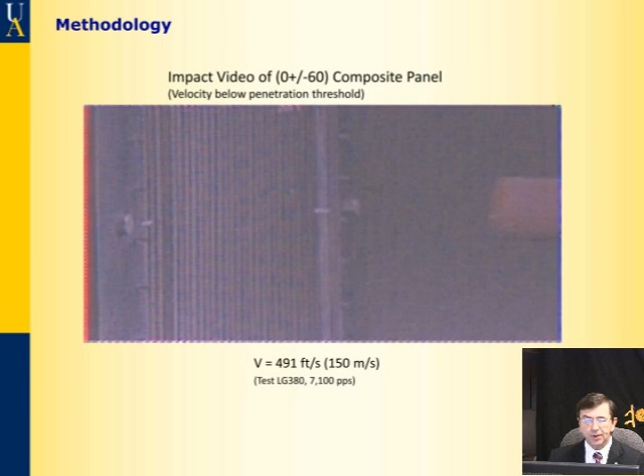To illustrate the high energy impact methodology, let me show you the impact experiment conducted using a gelatin projectile and a braided composite plate. This is the same composite material which has been recently used for the jet engine containment system. To characterize this material, we had to conduct numerous experiments of that type. As part of this research, we also had to create a numerical model capable of simulating such impact experiments. Accurate numerical simulations can be called virtual experiments.

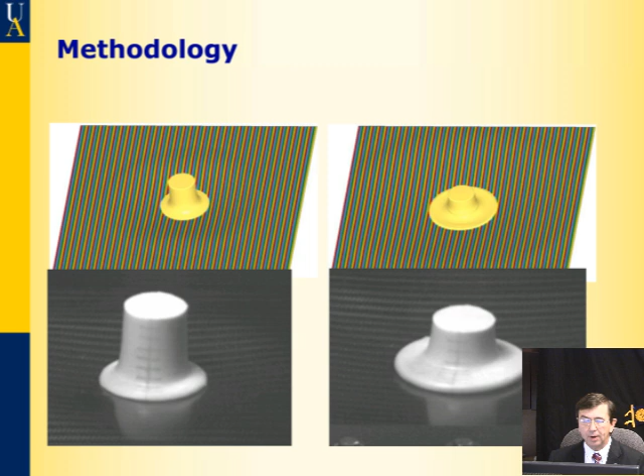First, we had to develop material models for gelatin and braided composites so we could simulate all kinds of impact experiments using LS-DYNA. You can see here deformation in 2 time instances. Each snapshot represents a comparison between the real and virtual impact experiment. It is also important to predict the damage modes. In the case illustrated here, a butterfly damage shape agrees with the experiment for a ±60 triaxial braided composite.

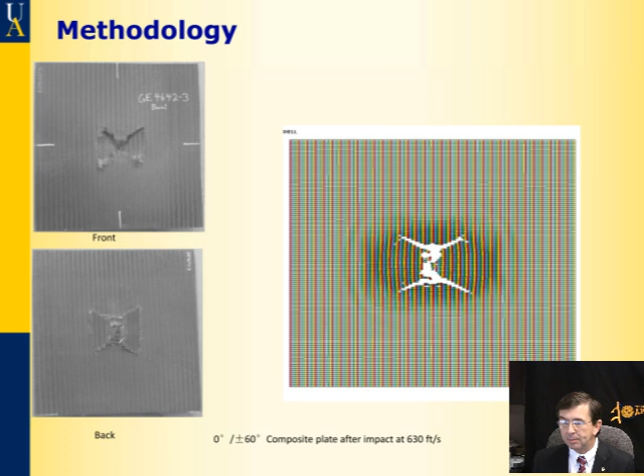Once the model properly represents reality, we gain confidence that we can obtain deformations and failure shapes for any other similar material and for various structures. For example, if we change the fiber architecture from 60 to 45 degrees in the composite, a different damage shape is produced. This shape can be correctly predicted using our model. The model so developed can be used by a jet engine company to design their proprietary engine components.

The FAA requires that commercial jet engine manufacturers conduct at least one blade-out test in order to certify their new jet engine or any substantial modification of an existing jet engine. Such tests are very expensive. Let me show a $20 million test as an example that was conducted at Rolls-Royce.

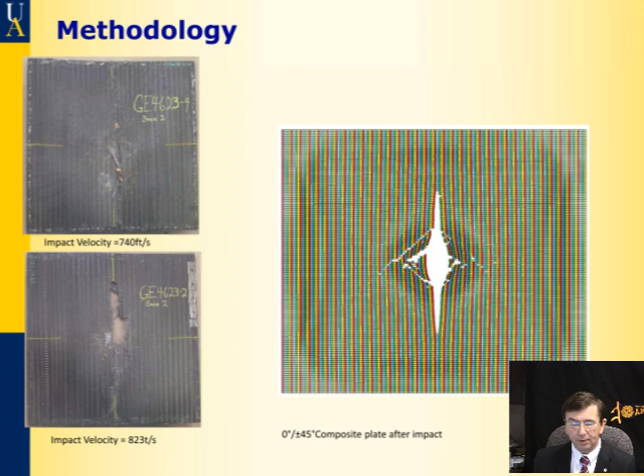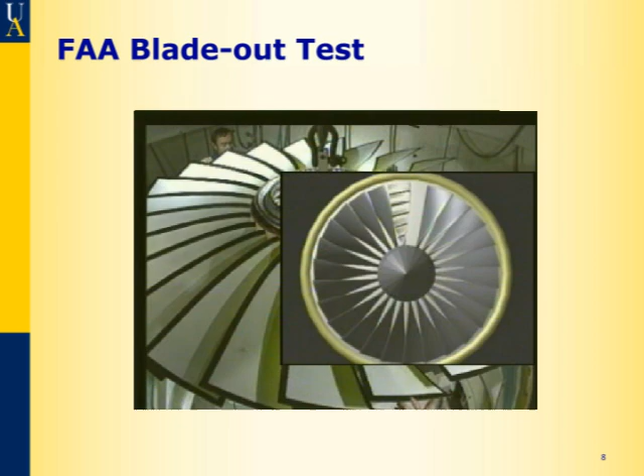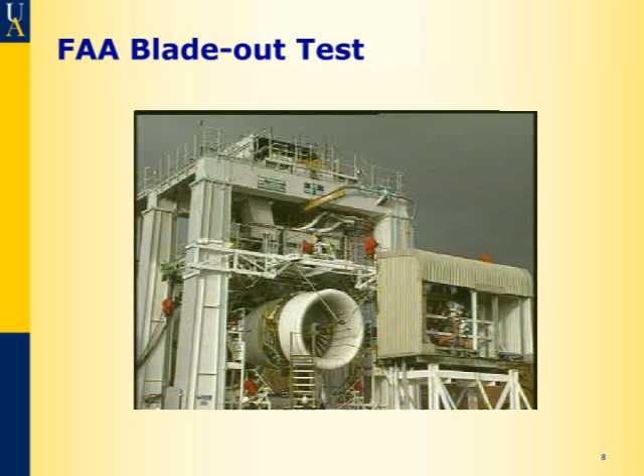In this test, a small explosive charge is used to release a fan blade from the disc. The engine has to contain the fan blade safely and also has to contend successfully with the resulting out-of-balance forces. This is a technology in which Rolls-Royce has a clear lead over any other manufacturer. Nevertheless, the fan blade containment test is regarded as an essential demonstration of safety and integrity.

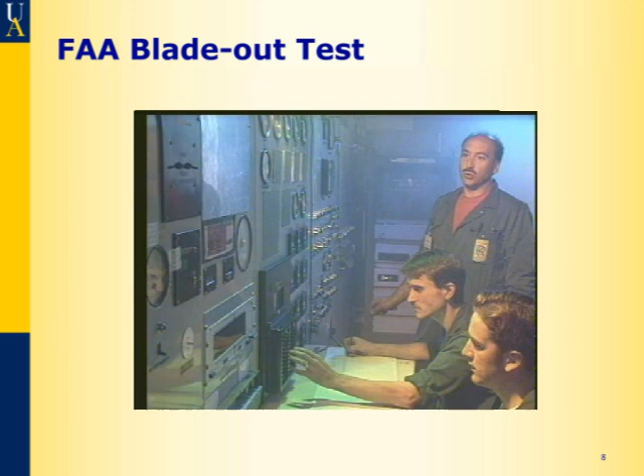A released fan blade contains enough energy to throw a medium-sized car some 100 feet into the air. In a full engine test, this energy is absorbed as vibration through the engine carcass—truly one of the most impressive sights in aero engine testing.

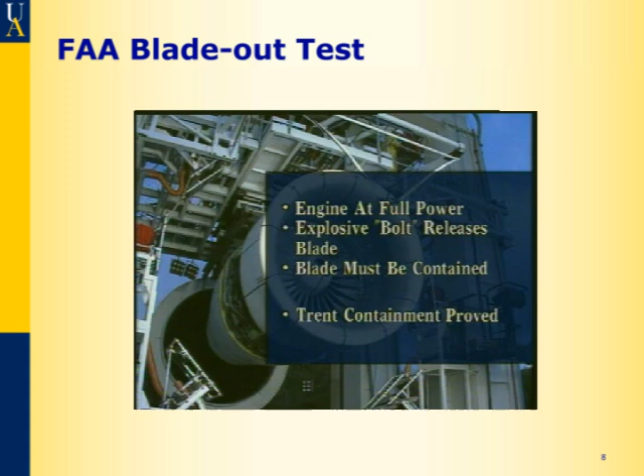Without any apologies, we'll show that again. This is indeed one of those occasions when only seeing is believing.

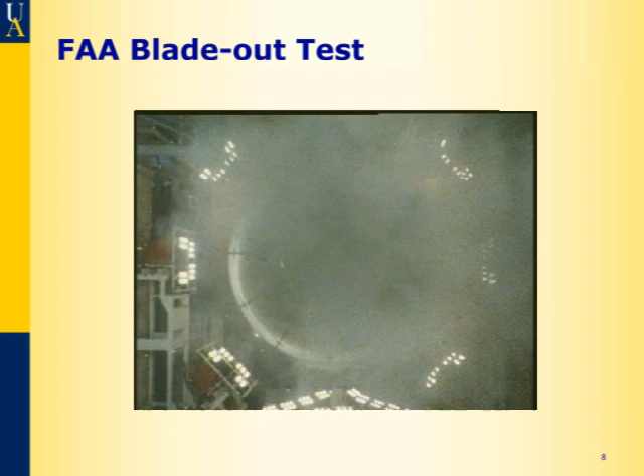Using the virtual test technique with developed material models, manufacturers can try different design concepts for their jet engine, virtually conduct the blade-out test, and become more confident when the real test is conducted. You can see here the simulation of the blade-out test using the model that we have developed.

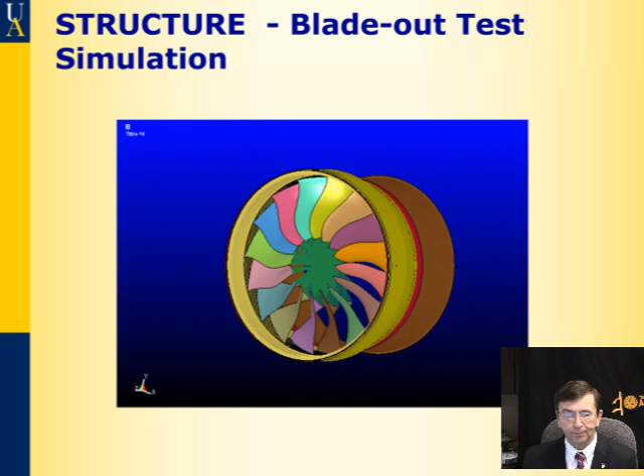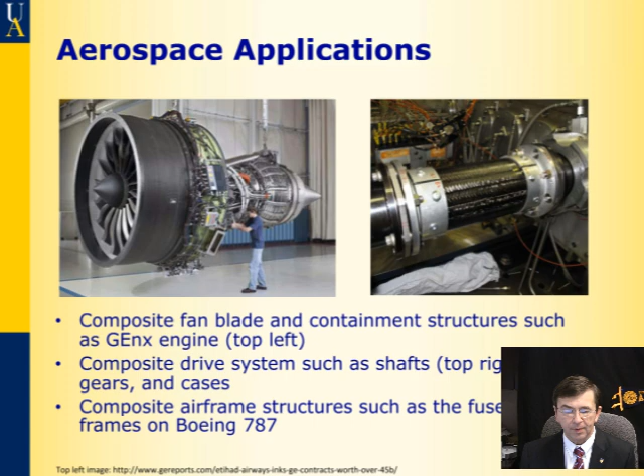As I said, the above shown braided composite material has been used for the containment system in the GEnx jet engine, but is also considered by other aerospace companies for different applications. On the left in this picture you can see the GEnx engine, and on the right you can see the shaft of the helicopter engine.

Before I show you how our methodology is used to analyze this airplane crash, let me give you some background information.

About this particular crash, the Russian investigating committee in their final report wrote in section 3.1.69 that the aircraft collided with the birch, with a trunk diameter between 30 to 40 centimeters, which led to the left outer wing portion of about 6.5 meters long being ripped off in an intensive left bank. Originally they put 4.7 meters, but then they crossed that out and changed it to 6.5 meters.

It is worth noticing that the longer the portion of the wing that is cut off, the larger and stronger part of the wing structure it cuts through. In section 3.1.70, it says that in 5 to 6 more seconds, the inverted aircraft collided with the ground and was destroyed.

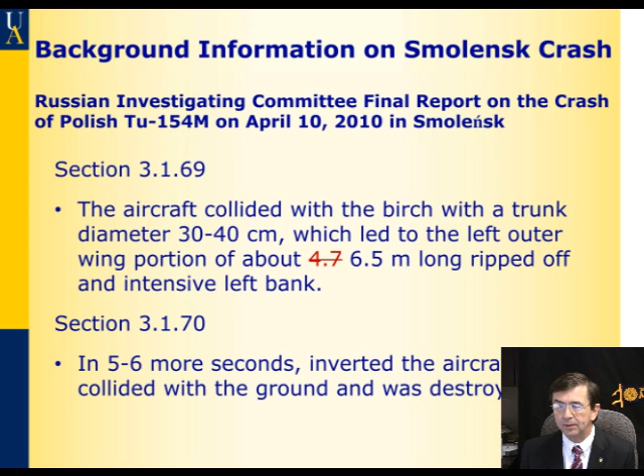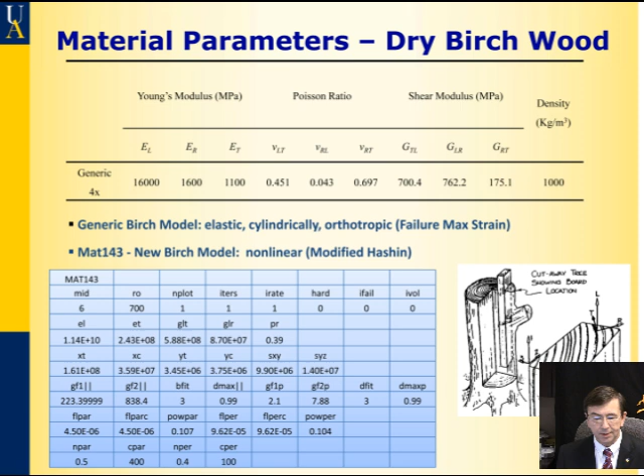I'm not going to discuss particular material properties, but I will mention that for the tree we use two different material models. The first is called generic, which is linear orthotropic, and the other is a special nonlinear model developed by the Federal Highway Administration for trees, called MAT 143. All the parameters are on this slide. I'll also mention that for aluminum we use two models to build confidence in our results.

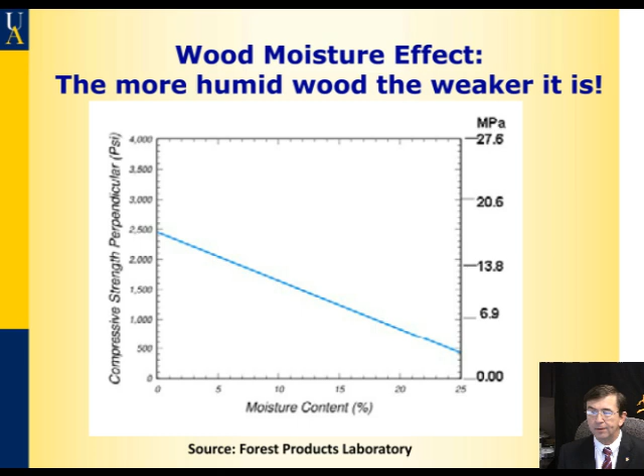But let's come back to the tree. It is worth noticing that wood is very sensitive to moisture content. In this plot you can see that wood loses 80% of its strength between dry conditions and 25% moisture content. In this plot you can see that dry wood is very brittle and stiff, while wet wood is more flexible and compliant.

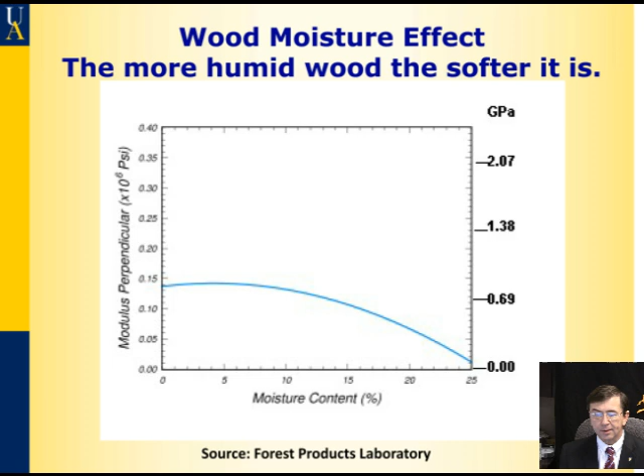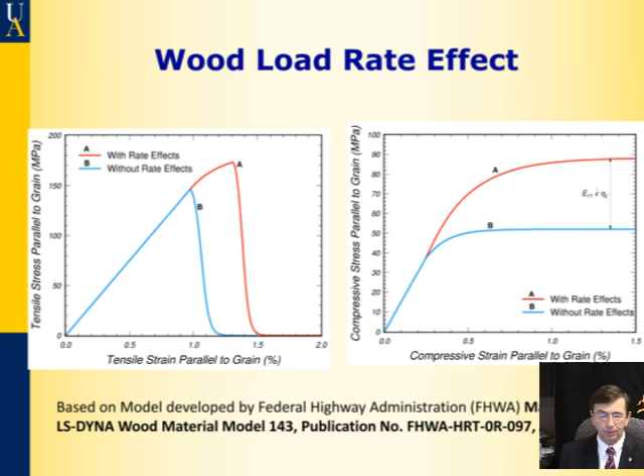Wood is also sensitive to the strain rate of loading, as shown in these two plots. MAT 143 model has all the above attributes.

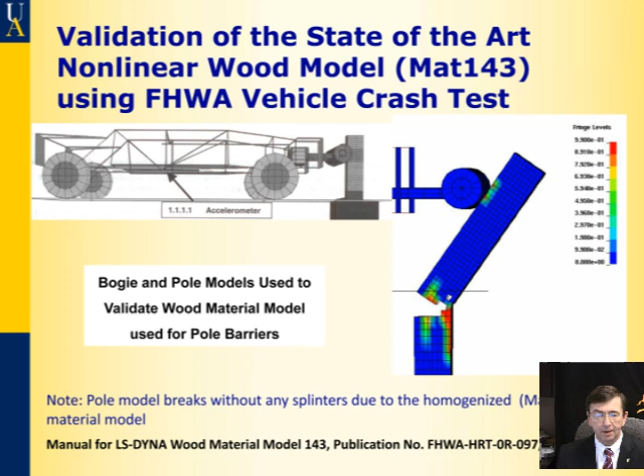MAT 143 model was also used by a team of researchers led by Bocchieri to simulate an FAA experiment conducted in 1965 using an airplane Constellation. The mass of the airplane Constellation is 40 tons, about half of the Tupolev 154M. The initial velocity was 207 kilometers per hour, also about 70-80 kilometers per hour slower.

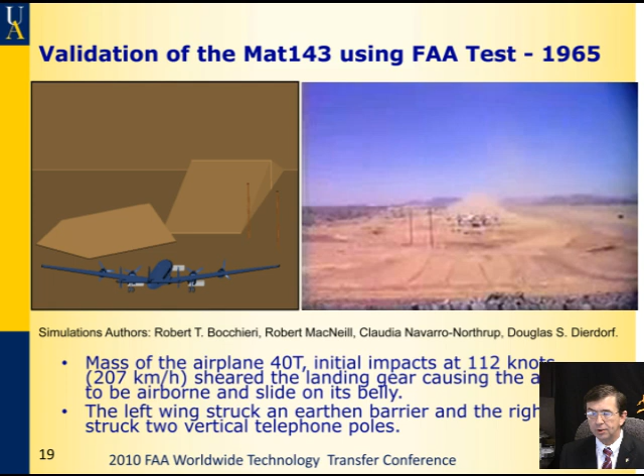At that speed, it sheared the landing gear, causing the aircraft to become airborne and quickly slide on its belly. The left wing struck an earthen barrier, and the right wing struck two vertical telephone poles, as you can see in this short video.

As I mentioned, the airplane Constellation was much lighter and slower. The maximum speed of the Constellation was 600 kilometers per hour, while the Tupolev 154M was designed for 900 kilometers per hour. So the wing of the Constellation is much lighter and weaker than the wing of the Tupolev 154M.

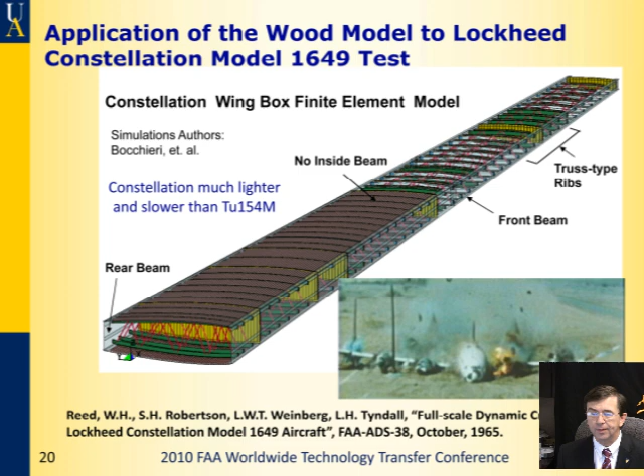You can see in this slide that the Constellation wing has front and rear beams, or spars, along its length, and instead of ribs it has a series of trusses. The wing of the Tupolev has an additional inside beam and a series of ribs.

In this slide you can see that the authors of the simulation of the airplane Constellation validated their simulation completely with the experiment.

They concluded that the inboard pole is cut by the wing, the inboard tank is compromised after impact with the ground, the outboard tank is damaged by impact with the second pole, and the outboard pole is also cut. Both poles fell in the direction of the airplane movement.

So MAT 143 can be used for this type of crashworthiness analysis.

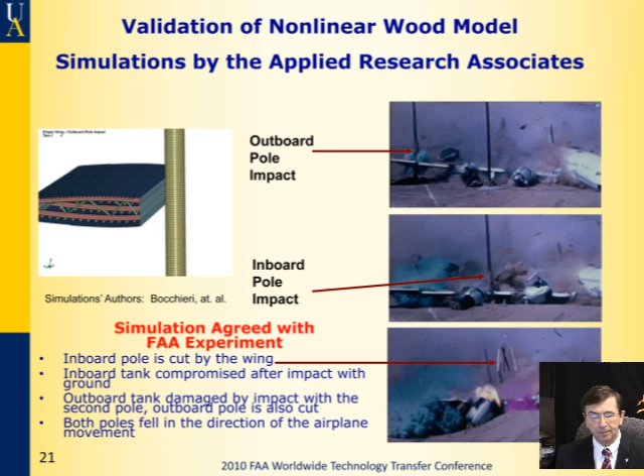Using a three-point bending experiment in my lab, we have also verified simulated behavior of a birchwood beam. We found that the generic material model is 4 times stronger than MAT 143.

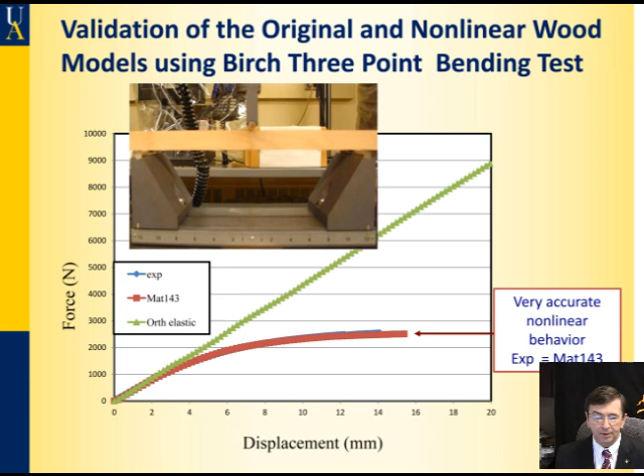Please note that the force-displacement curve produced by MAT 143 almost exactly covers the experimental curve, which is underneath the MAT 143 curve.

For the aluminum, we also use 2 material models. First, we use a generic elastic-plastic model with material properties obtained from the Russian database. Recently, we used an FAA-developed nonlinear model called Johnson-Cook, which is strain rate dependent.

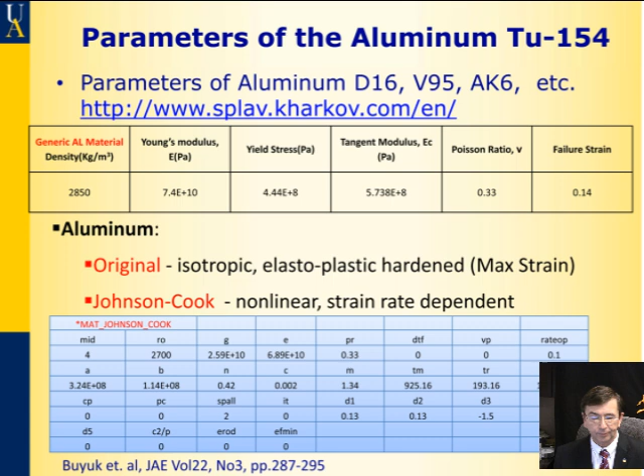These graphs illustrate stress-strain curves produced using 2 material models for the birch on the left and 2 material models for the aluminum on the right.

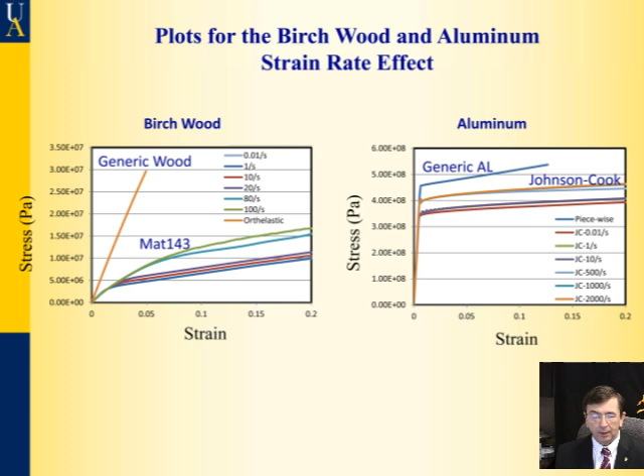The next step is to develop a wing model for the Tupolev 154M. This airplane was designed for 110 tons weight and 900 kilometers per hour speed.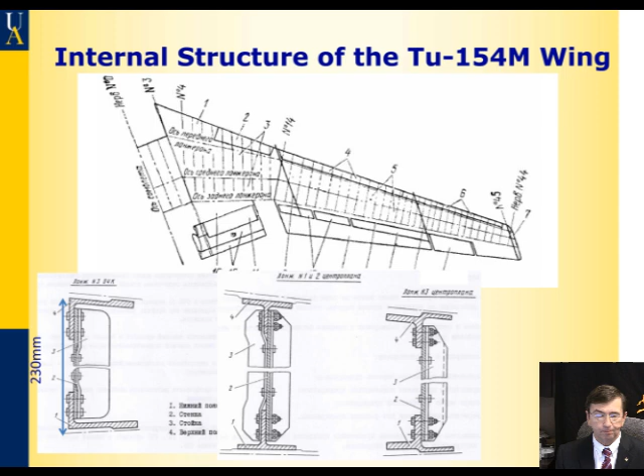I have not used stringers, so my model of the wing is weaker than the real one.

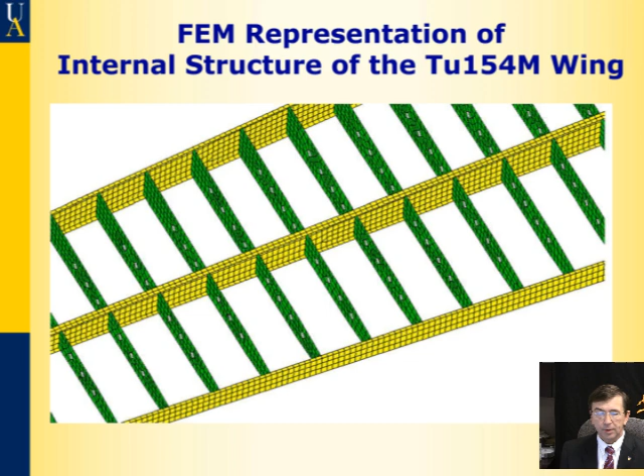You can see on the slide the finite element method model of the wing's internal structure. You can see 3 yellow beams and several green ribs.

I can mention that we simulated impact for various plane configurations and various velocity vectors.

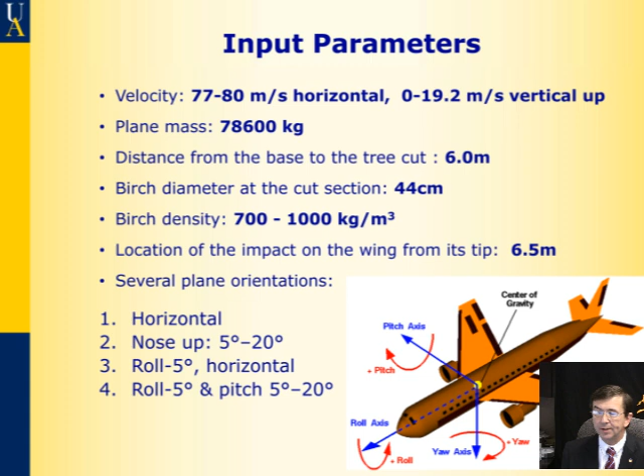The birch tree trunk diameter was selected to be 10% larger than reported by Russian sources, and you can see the birch density between 700 and 1000 kg per cubic meter and other parameters used in our simulations.

In order to use the aerodynamic pressures, we asked Dr. Brown from the Mechanical Engineering Department to calculate those pressures using ANSYS CFX, which we added to the LS-DYNA model.

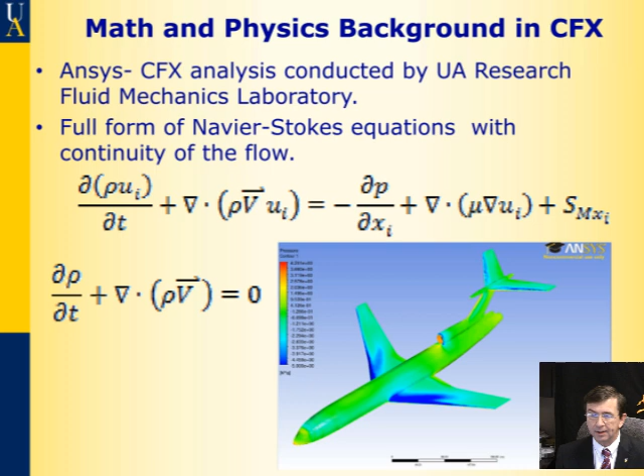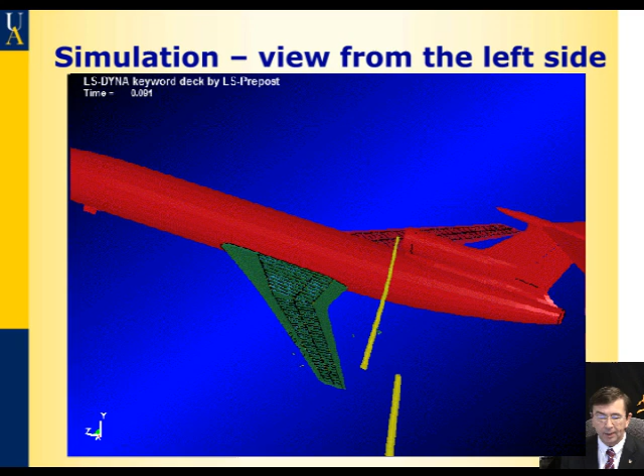The top part of the birch tree falls in the direction of the airplane's movement, similar to the simulation of the airplane Constellation.

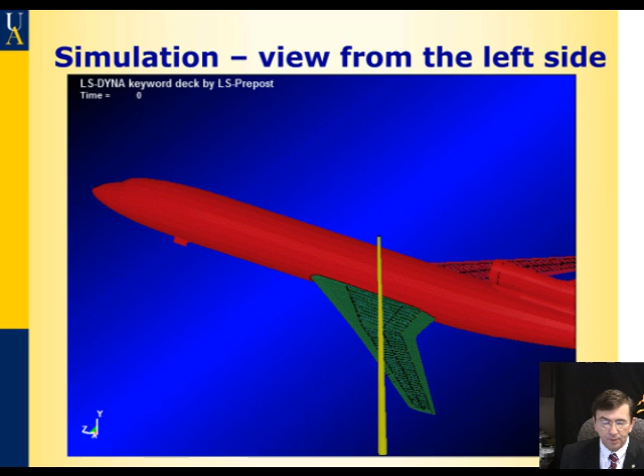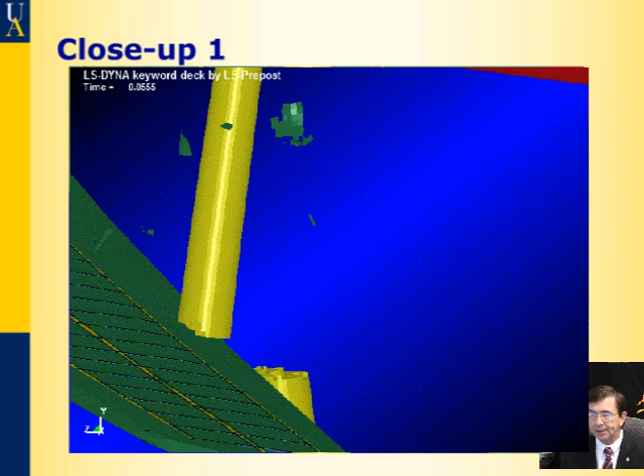Here you can see that the trunk of the birch causes damage to the front edge of the wing, but the birch is cut by the first beam inside the wing, exactly the same way as in the simulation of the Constellation, confirmed by the experiment.

This simulation illustrates the generic material model application.

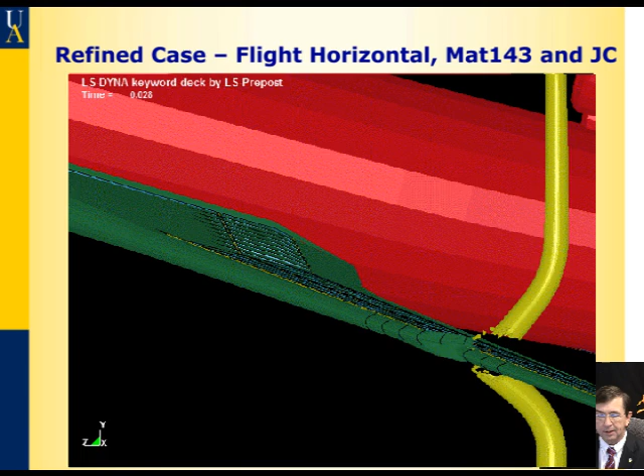Even using a very fine mesh, as shown in this slide, and utilizing more accurate nonlinear material models—MAT 143 for the birch and Johnson-Cook for aluminum—we always obtain similar final results.

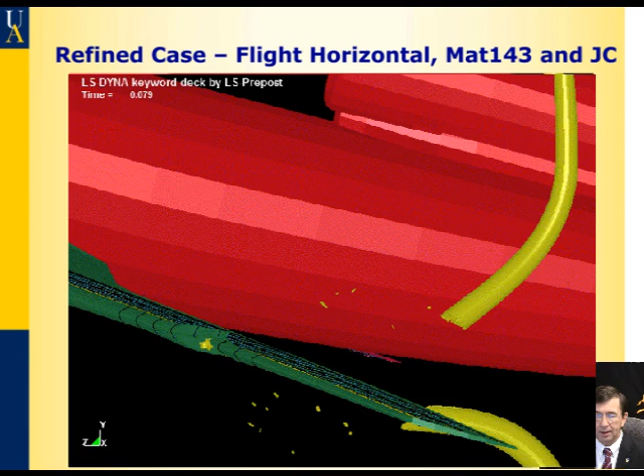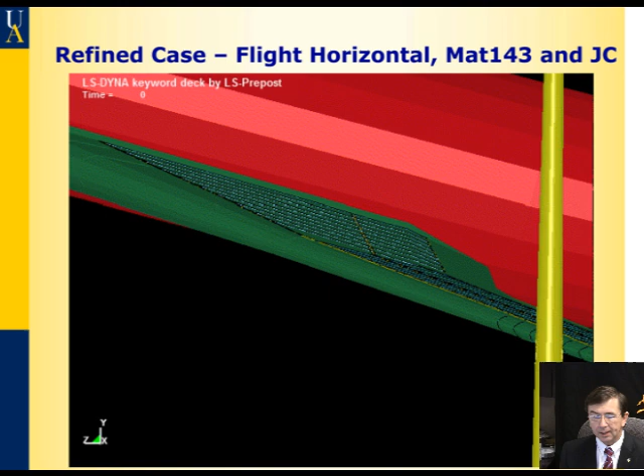This means the birch causes damage to the front edge of the wing, the birch tree is cut by the front beam of the wing, the lifting surface of the wing is not damaged, and the upper part of the birch tree falls down in the direction of the airplane's movement.

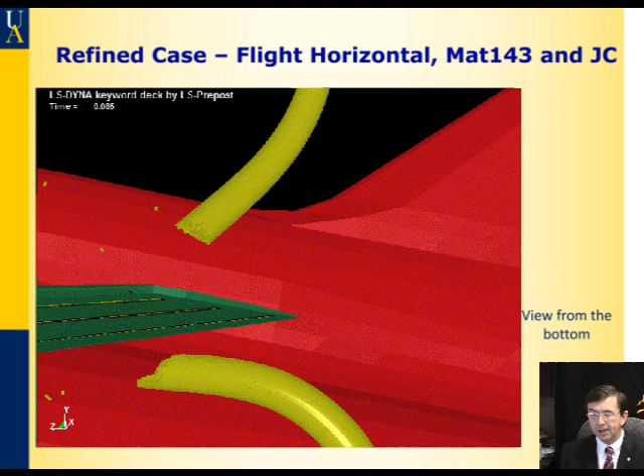Here we can visualize the same case from the bottom point of view. The lower part of the tree is pushed forward and, due to its inertia, cannot stop before the airplane flies away, even if the plane flies horizontally with a pitch of 14 degrees. So the bottom side of the wing is not damaged at all.

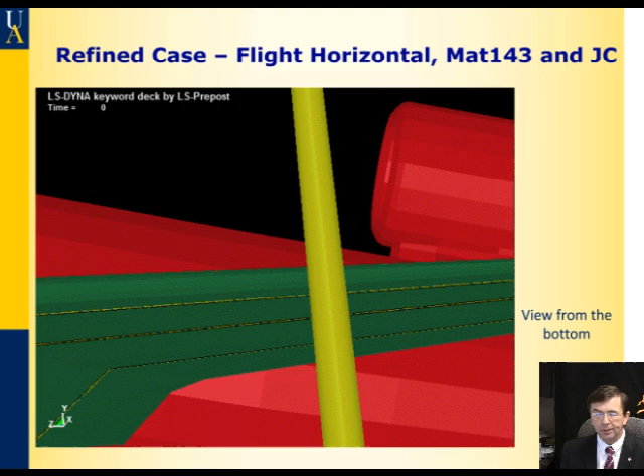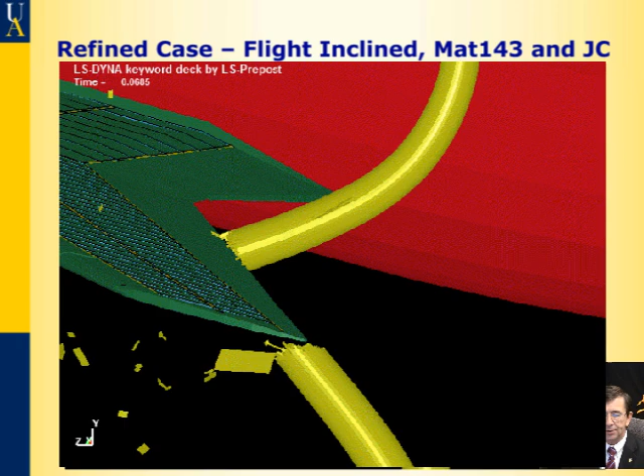In this case, the plane has 79 meters per second horizontal velocity and 19.7 meters per second vertical velocity. Again, the front edge of the wing, about 60 to 80 centimeters in length, is damaged. The birch is cut into two pieces and the airplane flies away.

In all cases, the top part of the birch always lands parallel to the direction of the airplane's movement. It is worth noting that photographs of the real birch tree from the Russian report show that the upper part of the birch tree landed perpendicular to the direction of the airplane's movement.

So we can conclude that, using parameters provided in the official Russian and Polish reports, the LS-Dyna finite element method model shows that the wing of the Tupolev 154M plane cuts through the birch for every analyzed scenario, for all original and nonlinear rate-dependent material models, for the finest mesh. The damage to the wing is localized on the edge, does not deteriorate the lift surface of the wing, and thus should not significantly reduce the ability of the plane to fly.

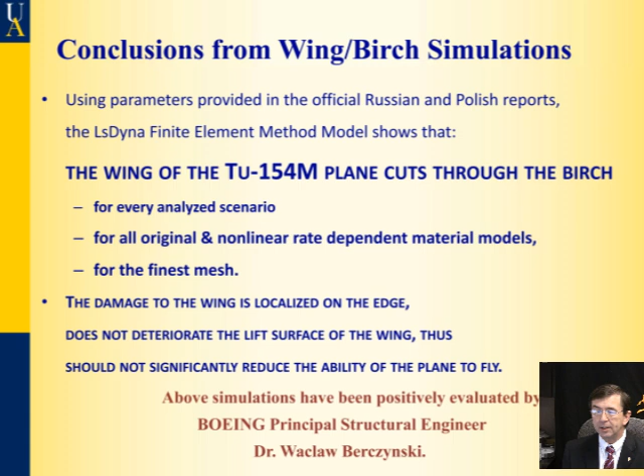These simulations have been positively evaluated by Boeing principal structural engineer Dr. Wacław Berczyński.

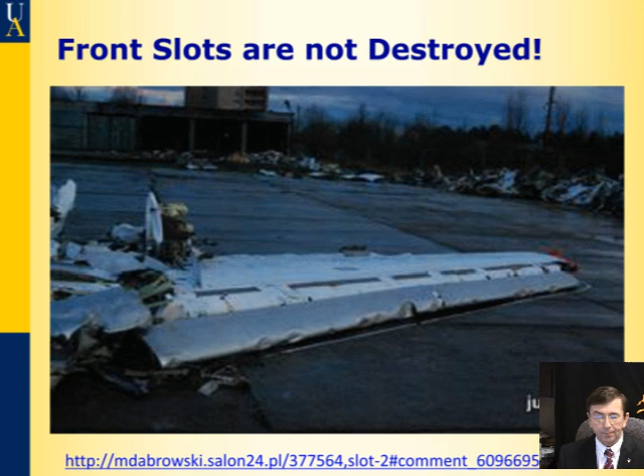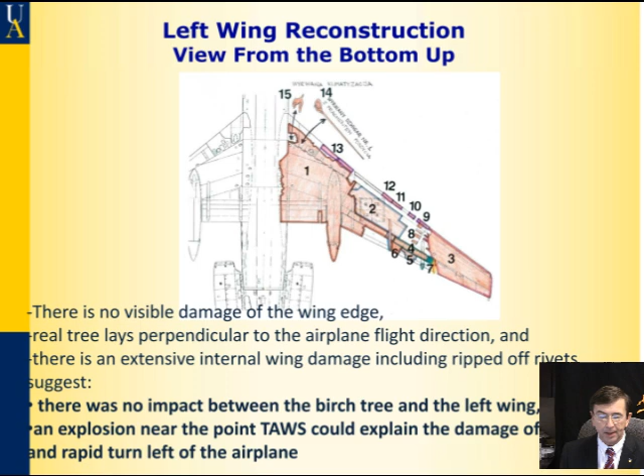Let's go to the next part of the crash analysis.

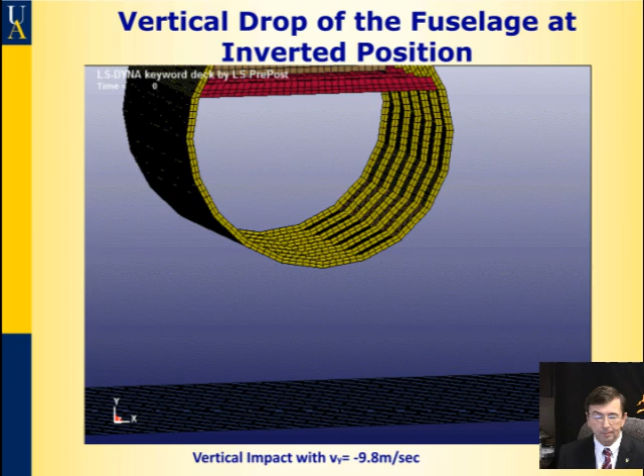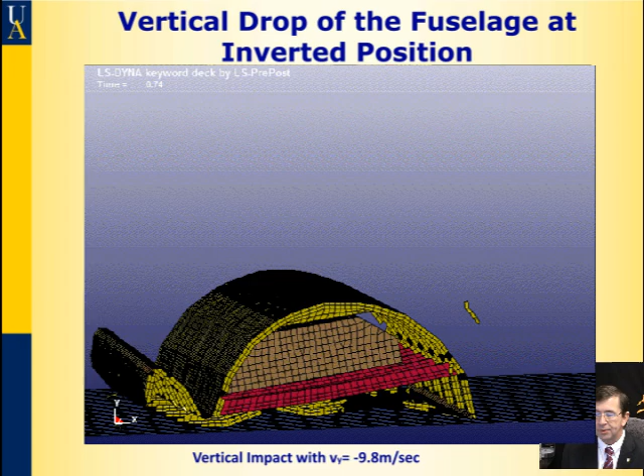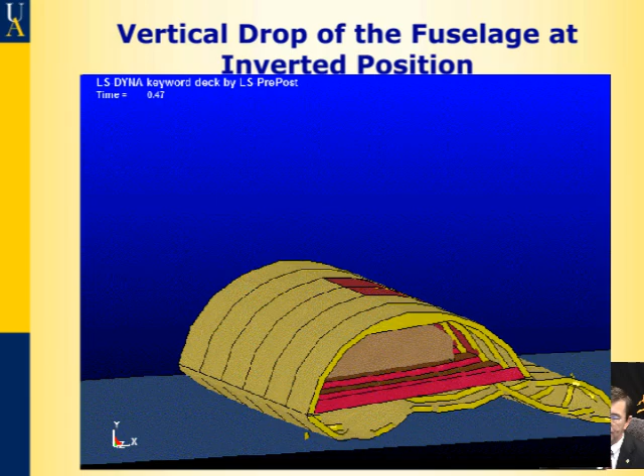Now I am going to investigate the fuselage damage if it is dropped vertically to the ground in the inverted position. In this simulation of the inverted fuselage, we can see that the walls and the ceiling are crushed under the red floor of the airplane. The same can be observed even if we add angular velocity to the drop velocity of the segment of the fuselage.

Sandia National Lab conducted similar studies, but using the effect of an explosion inside the fuselage. I can show now one of many simulations conducted by Sandia National Lab.

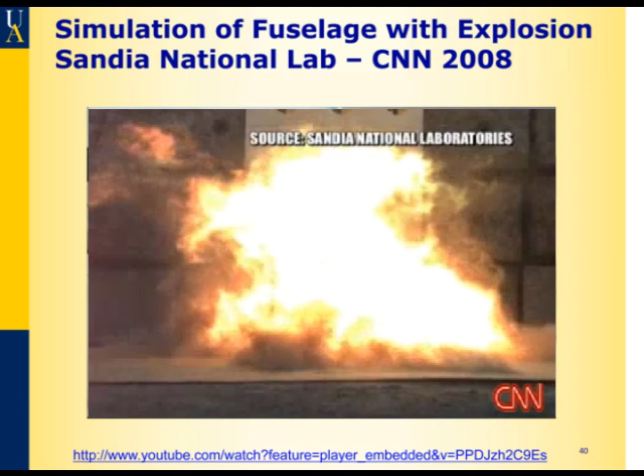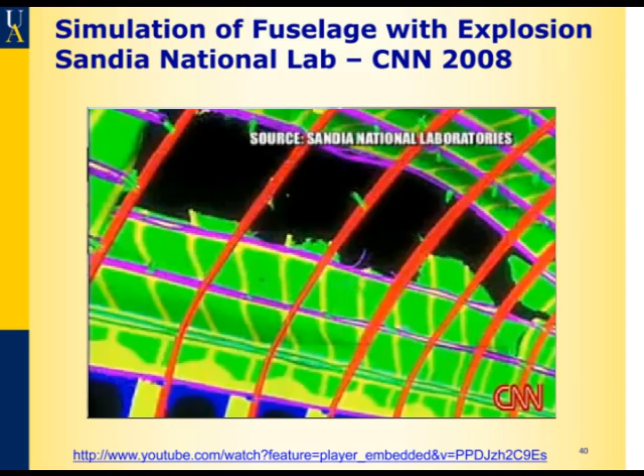That information is being used to create a computer model which shows not only how a plane is built, but how it will behave. Pressure data from different explosive tests are added: homemade liquid explosives, homemade powdered explosives, gels, just about anything that terrorists might consider. The model is helping scientists determine what damage different explosives will do, placed differently in different aircraft at different altitudes, and what it will take to bring a plane out of the sky.

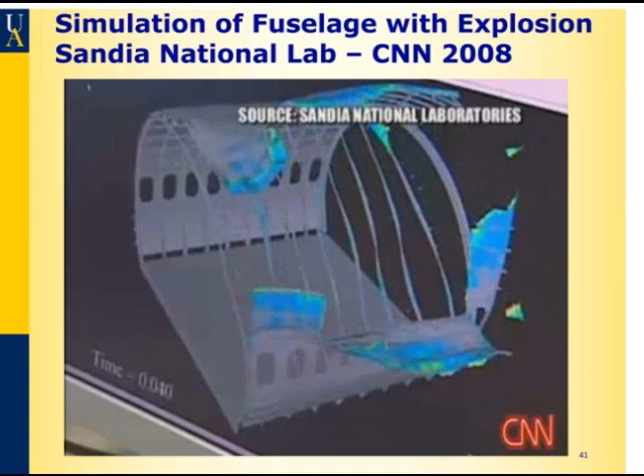So, if an explosion happened in the fuselage before the plane crashed into the ground in the inverted position, the walls and the ceiling of the fuselage can open outside before the crash, and they will not be crushed under the floor.

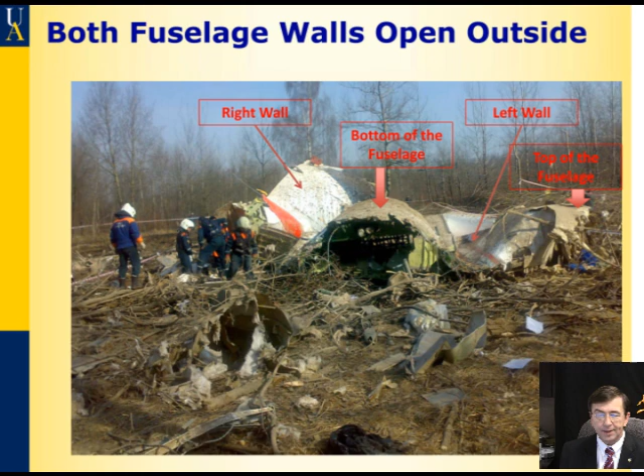This is exactly how the section of the fuselage of the Tupolev 154M was found at the Smolensk crash scene. It is shown in this photograph. You can see the right wall, and then the bottom of the fuselage with the floor. On the other side is the left wall, and the ceiling, or top of the fuselage, is completely outside.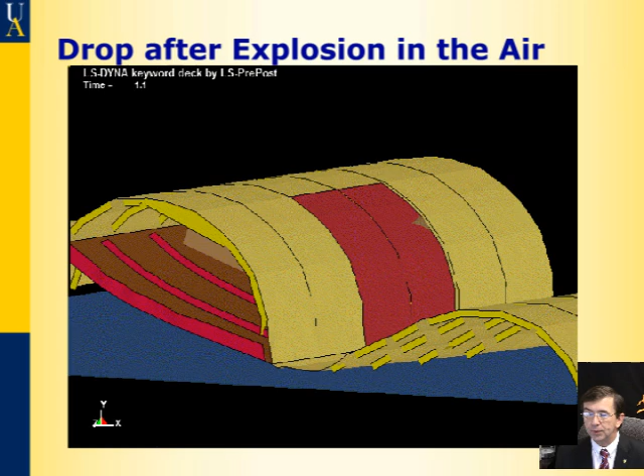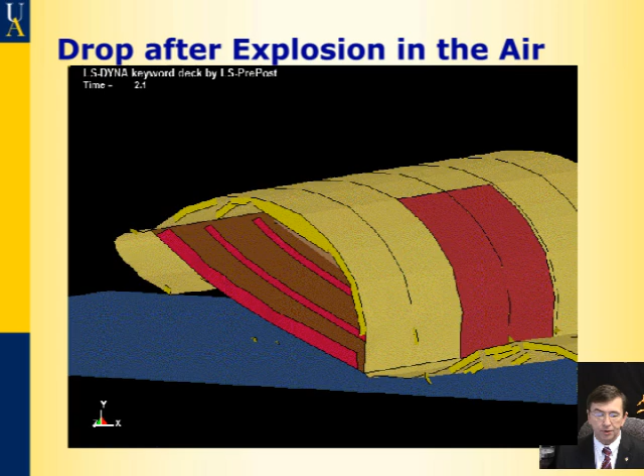Sandia National Lab simulation results explain this configuration by an explosion in the air before the crash. I conducted the simulation with the explosive using LS-DYNA, and we can see that both walls and the ceiling open outside before touching the ground.

So neither side of the wall or ceiling is crushed under the floor.

Finally, let's assume that there was no explosion, and let's analyze what would happen if the Tupolev 154M airplane as an intact structure crashes into the soft soil in Smolensk.

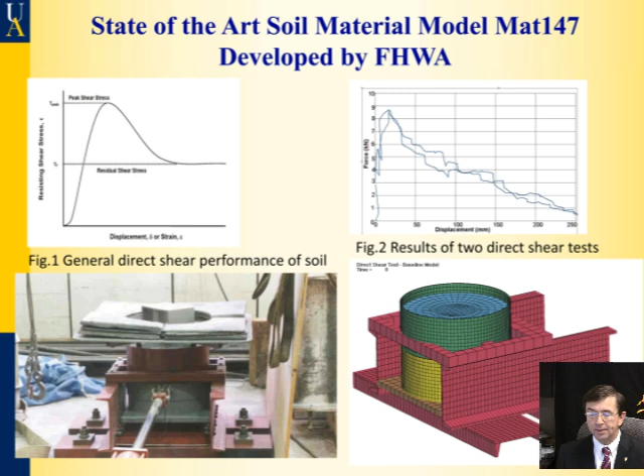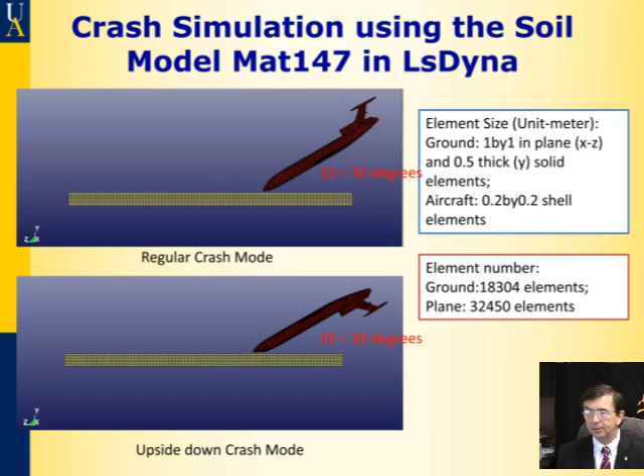The soil model was developed using Federal Highway Administration direction, called MAT 147. You can see on the screen the experimental system used to develop the shear behavior of the soil. On the top right are experimental data, and on the bottom right the LS-DYNA model used for characterization of MAT 147. We considered two configurations for the airplane crashing into the ground: a 30 degree striking angle and a 10 degree striking angle.

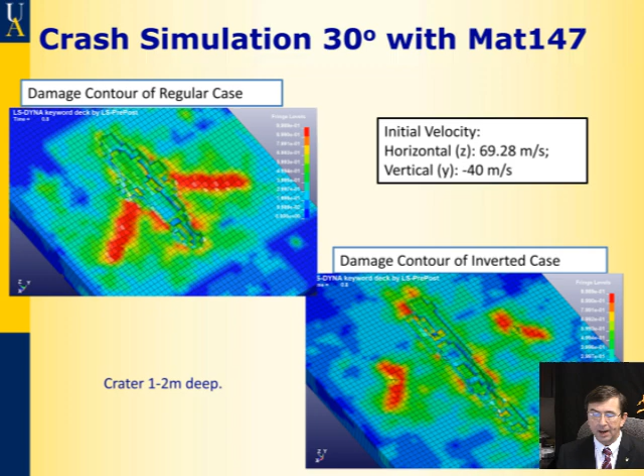Both cases are analyzed in the regular and inverted positions. For the 30 degree crash, the vertical velocity is about 40 meters per second, which is more than 5 times faster than any probable velocity of the Tupolev 154M, considering that this plane dropped from 30 to 40 meters. The simulation shows a deep and elongated crater formed in the soil.

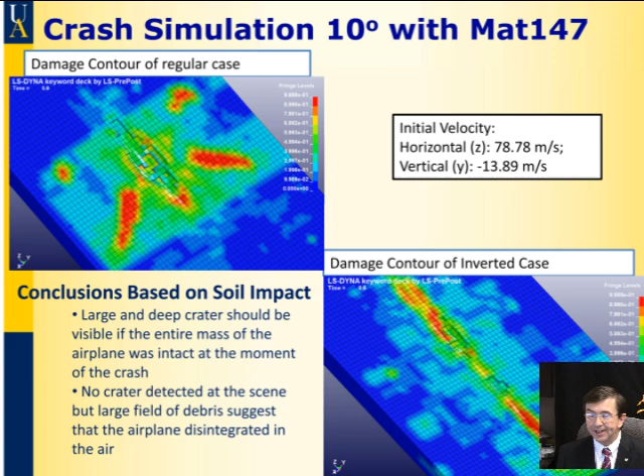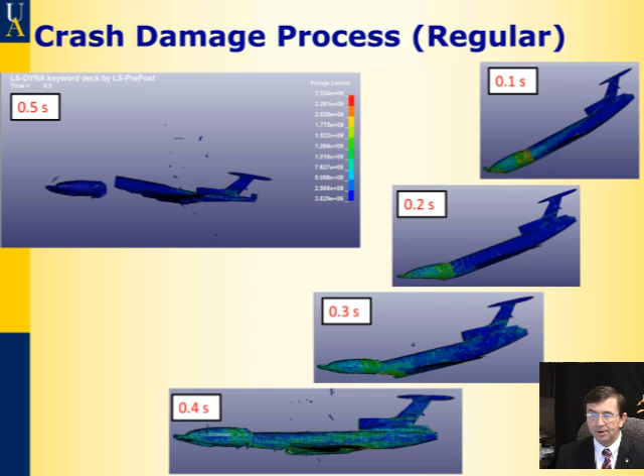If the airplane crashes at an angle of 10 degrees, the vertical velocity is 14 meters per second, and craters are not as deep, but they are longer and clearly visible. So we can conclude that large and deep craters should be visible if the entire mass of the airplane was intact at the moment of crash. No crater was detected at the scene, but a large field of debris suggests that the airplane disintegrated in the air.

In this slide we can see the disintegration of our airplane model due to impact with the soft soil. The plane breaks into 3 pieces. Most of the damage is concentrated in the front part of the airplane.

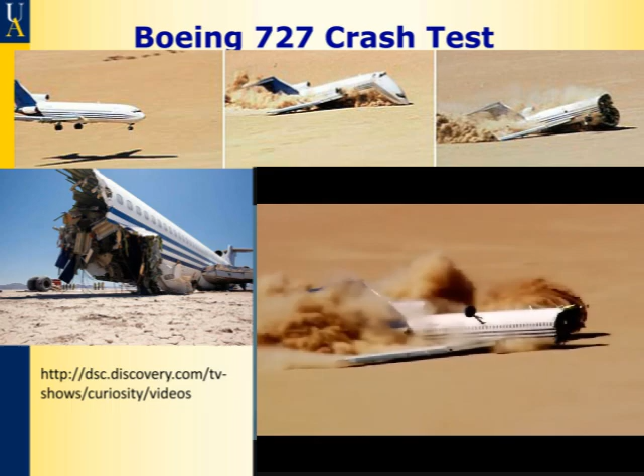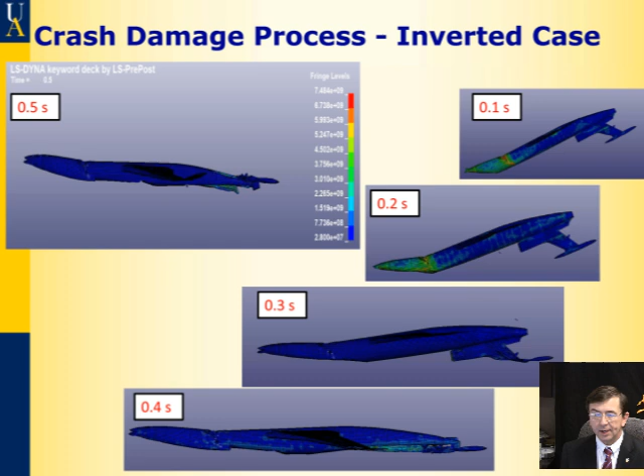The simulation of the same airplane crashing in the inverted position produces even less destruction to the fuselage than the simulation for the crash in the regular position. Accelerations felt by passengers are even smaller than in the regular crash situation.

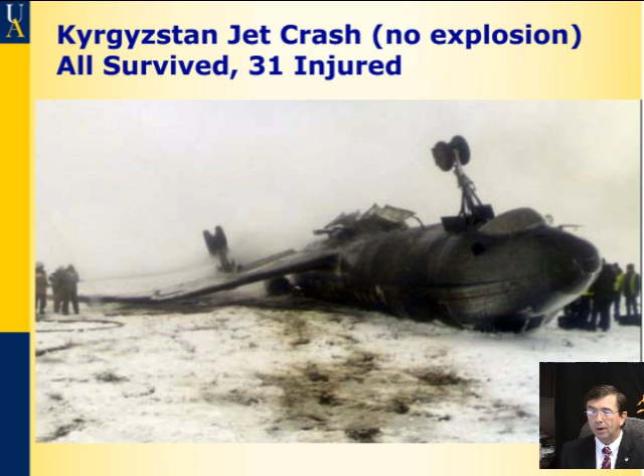This is one of many examples of real crashes in the inverted position. Dr. Witakowski mentioned that about 4% of all crashes are belly up. In this case, the Tupolev 134 crash landed upside down in Kyrgyzstan. All passengers survived and 31 were injured.

In this example, a Tupolev 154 crashed into the forest, broke into several pieces but did not explode. The report says that all people survived, 83 were injured. I heard that 2 of the passengers died later on, perhaps in the hospital.

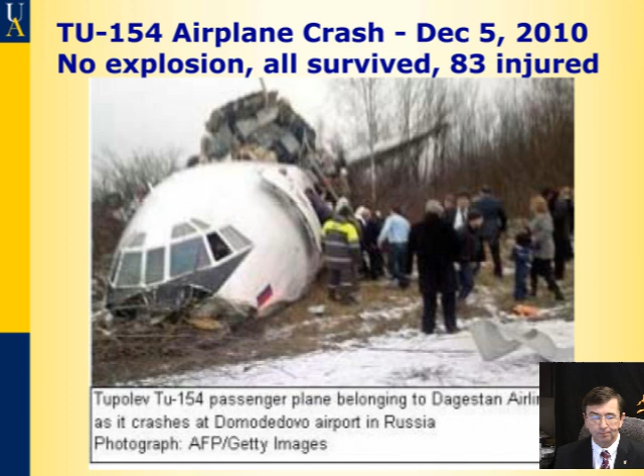In the case of the Polish Tupolev 154M, all passengers died. The airplane disintegrated into millions of pieces as small as a hand, over a large area of about 2 square kilometers. Some parts of the fuselage were found in a regular position, some parts were found in the inverted position. Rivets were found in the bodies of some passengers.

In the fall of 2012, some Polish experts sent by the Office of the Prosecutor were allowed to investigate the wreckage of the plane and the crash scene in Smolensk. Using electronic detectors, they found with 99% accuracy traces of explosives on the inside and outside parts of the airplane. They collected several hundred samples for lab tests to confirm their detection, but the Russian authorities did not allow them to take those samples to Poland for testing. We hope that those samples will land in Poland soon.

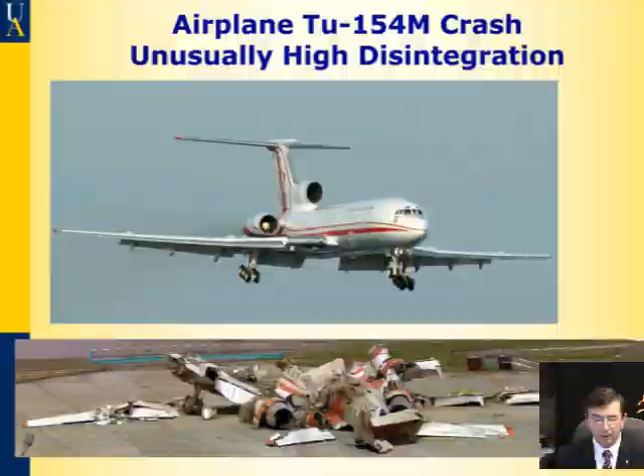Final conclusions: Separation of one-third of the left wing could not be caused by the impact with the birch tree. Most probably, separation of a fragment of the left wing was caused by explosion in the air. Open walls outside of the fuselage indicate mid-air explosion. The unprecedented degree of damage and the large number of shrapnel indicate high-energy mid-air explosion. Lack of a visible crater at the crash scene indicates that the airplane disintegrated in mid-air.

Without a mid-air explosion, most of the passengers in the center and aft sections of the airplane should survive any crash from 30 to 40 meters into the soft soil. The official Russian report attributed death of the passengers to 100 G acceleration. Such acceleration could be explained by explosion in the fuselage, shockwave produced by explosion, and/or a direct impact of the passengers with the ground at 80 meters per second without any protection of the fuselage. Thank you.